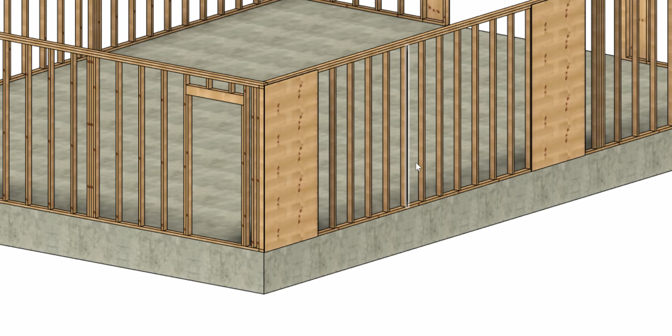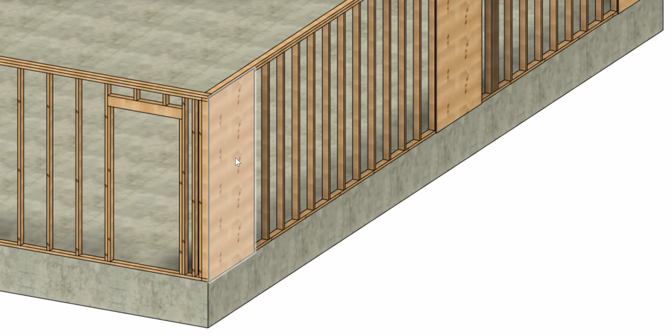Well, there's many ways, but in most cases, we're going to be using sheathing panels on the outside of the house. This could be plywood or OSB, and this is an example of what it would look like. Now, there would usually be a bunch of them all the way around the house, but in this case, I only put on a few to show an example of the panels themselves being in a certain spot to serve a certain purpose. So normally you would just cover the house in this and you'd be totally good to go, over designed, no problems. But I'm just showing you, here's a panel.

They're usually 4 feet by 8 feet. You can buy them in 9-foot tall sections and 10-foot tall sections, and questionably up to 12-foot tall sections, maybe, depending on what product you're buying. But you can get them taller if you have a 9-foot ceiling or 10-foot ceiling, things like that, to make it easier to install.

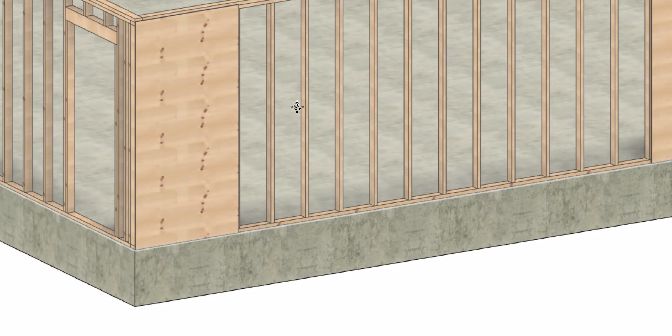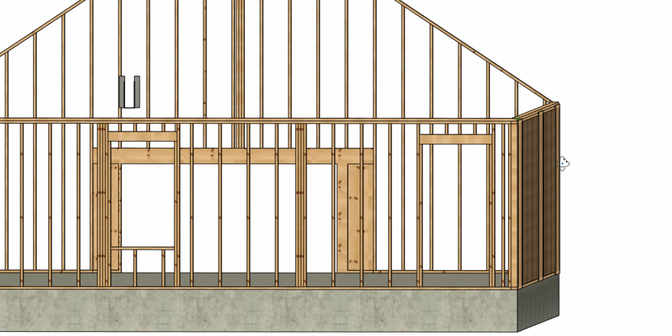But the purpose of these is when they're nailed to the studs, it prevents the wall from being racked sideways. So this wall can't rack over to the right, fall over to the right, can't fall over to the left. So when the wind blows on the front of the house, it tries to push the house into the screen from this view, and from this view, it's trying to push the house over to the right. These panels on these walls are going to resist that, and they're going to stiffen up the assembly and give it some strength laterally. So one of the methods is sheathing panels.

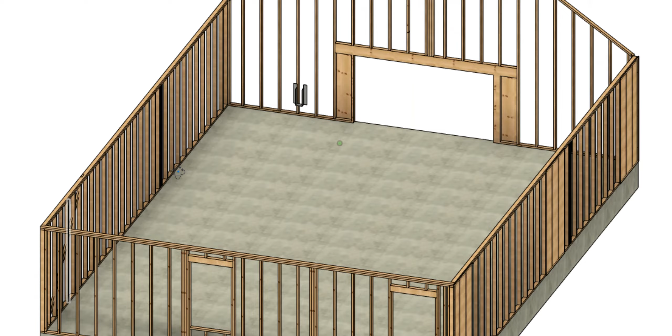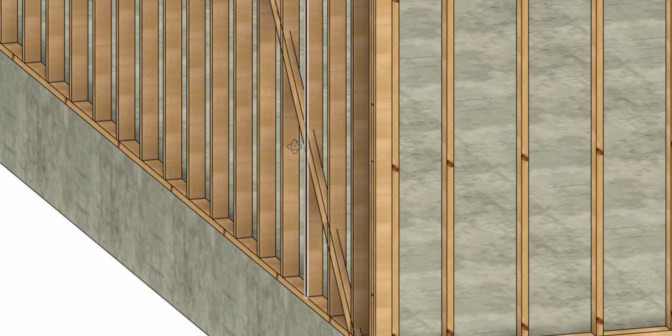Another method is a let-in brace. Usually these are going to be installed on the interior walls of a house if they're needed, and usually, if it's a 2x4 wall, you're going to use a 1x4. And if it's a 2x6 wall, you can use up to a 2x4, a little bit thicker. But the basic premise is you're going to actually notch out your studs and you're going to push this board into the studs and nail it on. And it's going to connect all the way from the bottom plate to each stud up to the top plates.

And it's going to act as the same resistance to racking motion that the sheathing panels would, but these are a lot easier to put and hide inside a wall. You don't need to put sheathing on the outside of a wall. So that's why those are better suited to the inside of a house.

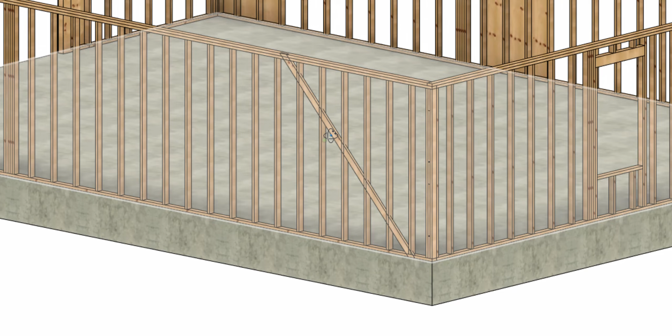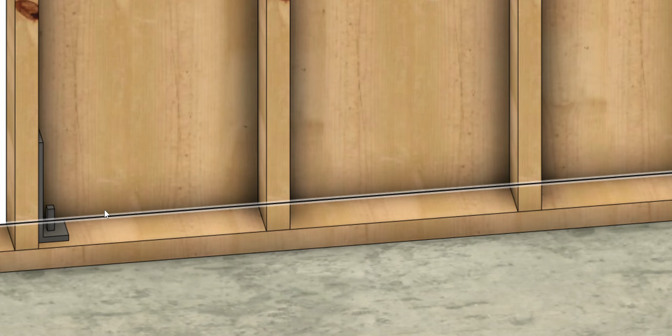So some other things that we could talk about are anchor straps or anchor bolts. Sometimes we need hardware in special locations to hold things down to the house. So for this panel, for example, to not rotate to the left or rotate to the right, we need to hold down each corner depending on the design. And we would do that by using what's called a hold down. It's basically a big strap that gets nailed to the stud, and it usually has a bolt and a nut that's anchored down to the concrete or anchored down to something that's part of the foundation that's very heavy.

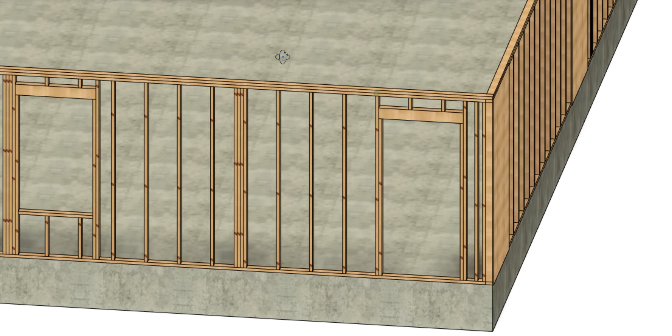It's going to resist that. And they're going to put one on each side. I didn't draw one over here, but you'd put one on each side of the panel so that the wind could blow either direction and the panel can't rock, can't pick up off the foundation. And that's in addition to the regular anchor bolts that are going to be placed around your foundation to keep your walls bolted down to your foundation. So anchor bolts, that's what those look like.

There are some things called strong walls that Simpson Strong-Tie makes that are basically shorter panels that serve the same purpose as a sheathing panel would in terms of adding lateral stability to the wall assembly, but they're used in smaller spaces where maybe you can't fit a wide enough sheathing panel, like a 48-inch panel or 36-inch panel. You don't have space for it because there's not enough wall area. So you would put one of these in there.

Now these are a little more expensive to get and to install, but if you have a design and that's the only way to do it, then that's the way to do it. You can get them pretty narrow. So that's another example of something that can be used. And occasionally you will also see, here's one drawn here. This is a portal frame. So this is a way to describe getting lateral stability out of a spot with very little wall area.

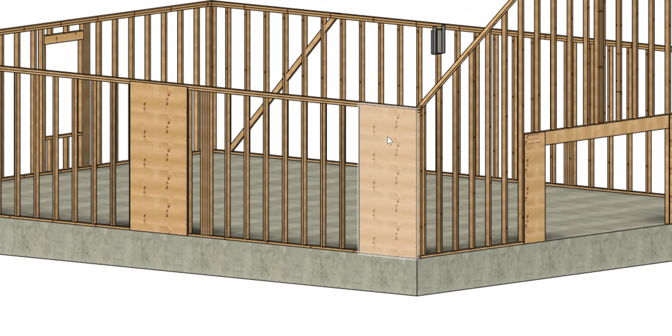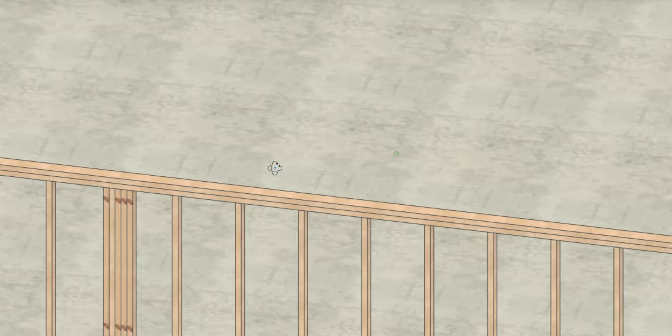I drew one on the back here, modeled it up. The basic premise is, and this was modeled fairly quickly, ignore the fact this is not necessarily even, but the premise is if I need to get lateral stability out of a piece of wall and I can only fit some narrow panels next to my opening, then if I extend my opening header past the opening and then overlap it with a sheathing panel on the outside of the house, and then nail it together with a bunch of nails in a particular pattern, then I am basically creating one large assembly that allows myself to gain a lot of rigidity in my wall laterally.

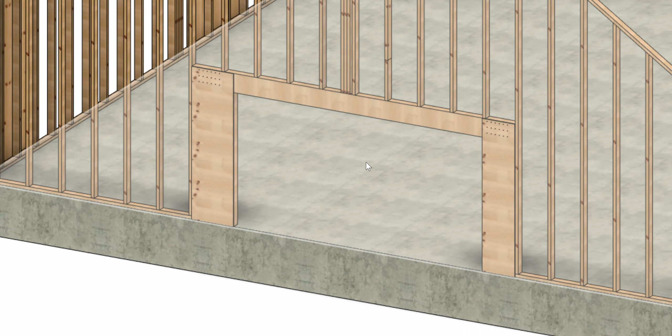So that's called a portal frame. There are a few different kinds of those we could make. There's a bunch of drawings of them in the International Residential Code. That's where you can find those. But those are some examples of some tools we're going to use.

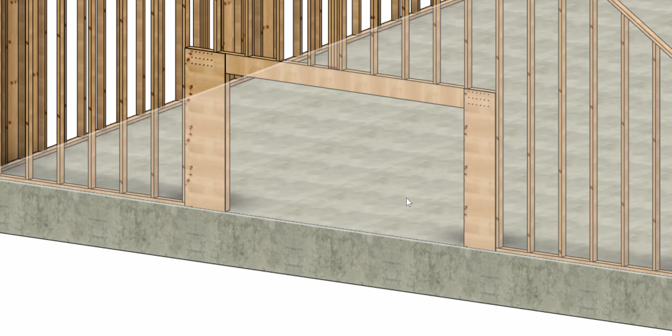You can also account for sheetrock. Sheetrock, when it's installed over the whole house, adds lots of lateral stability to the house. Now, normally we don't account for it because we like to know that our structure is going to be good based on the wood we're putting in, but it can be accounted for sometimes if we need the exception to be made. So those are some things to be familiar with.